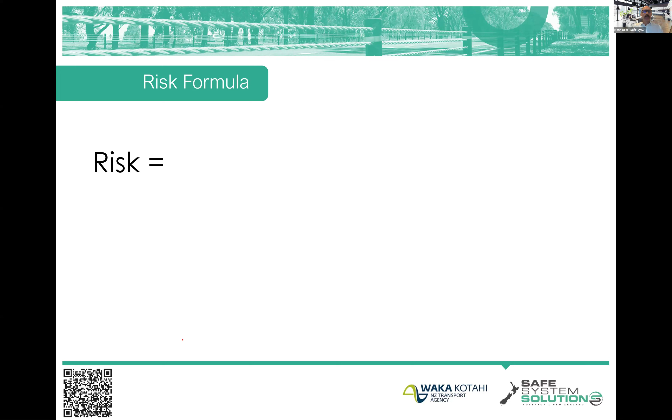So likelihood times consequence, or probability times severity, or probability times consequence. It's the chance of something bad happening multiplied by the magnitude of that badness, the severity of that.

Now, I am also going to give a prize out to who was it here - Connell, because Connell was sort of adding exposure, which is a little indication that Connell's probably got a bit of an idea of the safe system assessment methodology, which has extracted out exposure from likelihood, from traditional likelihood.

So if we go back to normal risk, that's the international definition of risk, not just for road safety, but anything - financial risk, environmental risk, you name it. It is, what's the risk of recession? Well, what's the chance we go into recession? How deep a recession do we go into?

But in road transport, the likelihood really encapsulated both the number of people exposed to a risk, then the chance that risk comes to fruition in a crash, then the severity of that incident. So when developing the safe system assessment methodology, which is the first component of a safe system audit, it was distinctly extracted out: exposure, likelihood, and severity.

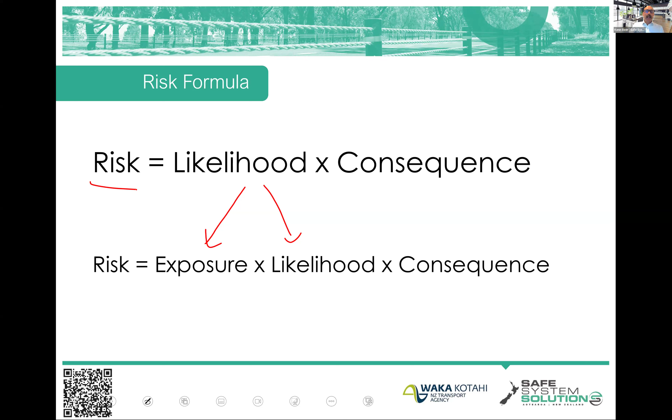And we sort of touched a little bit on that at the end of last session. I'm going to keep expanding on this, but just to show you, from an infrastructure perspective, what sort of things would influence exposure and likelihood and severity in terms of the infrastructure chosen?

Here's just an example of essentially closing off a conflict point, which is a railway level crossing in this one. It's a bit hard to see in this photo, but there's a mound of dirt and road closed signs on the other way. There is now no exposure to that crash. You could phrase it that there's no likelihood of crash because nobody's there, but that's driven by the exposure, the number of people exposed to that crash.

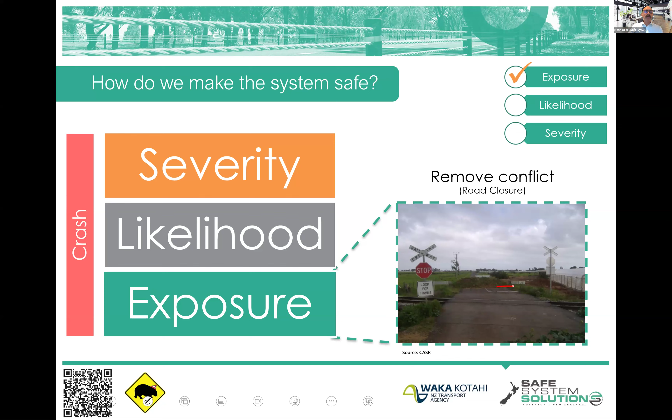Another one - sorry, and I should have said, count your wombats again in case that one on the last slide snuck through.

The other one is to completely segregate a road user group onto their own path in terms of bicycles or pedestrians or shared paths, and the exposure to the crashes has been removed - the crashes being the vehicle to bike crashes, for example. Yes, there's still the possibility that the bike itself crashes, runs off the path, or crashes into a pedestrian or the like. But when you isolate it out to the particular crash types, we understand that exposure has been removed.

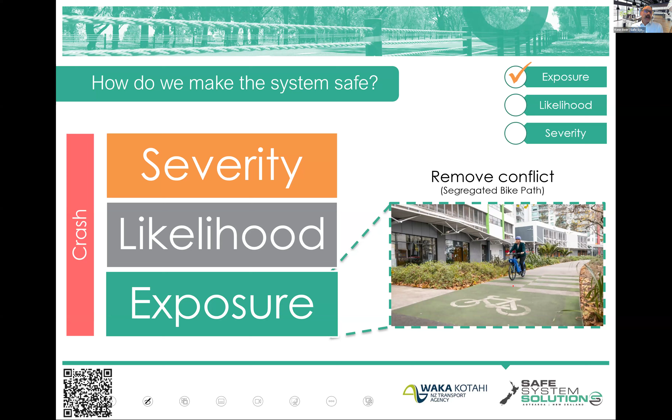The likelihood of crash is all the things that you can do to lessen the chance a crash will occur. And we've done a lot of these in a traditional sense for a long time. So we've got things like geometric design, presence of shoulders, line marking, lighting, surface conditions we provide.

In more recent times, we've started doing things like wide center lines, as you can see in that picture there, which I took sitting in the passenger seat in the car with Marcus, who's on this webinar. So all of these things, delineation, anything like that, is trying to stop the crash happening in the first place, and it lessens the chance of the crash.

But with all of these, generally we see the same severity of crash if it happens. So the wide center line, for example, we're lessening the chance of a head-on crash because people have a little bit more time to recover. But if a head-on crash occurs, it's the same speed, same angle configuration basically, and we're going to get the same outcome.

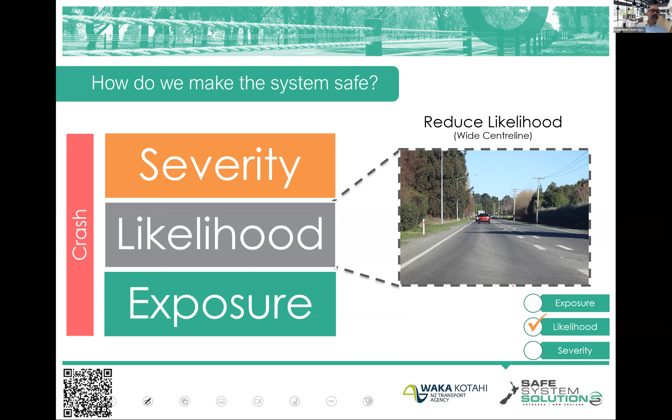Even traffic signals themselves only reduce the likelihood of crash. There will be some crash circumstances where they've influenced the severity a little bit, but what we see is that people drive through red lights unintentionally, also intentionally, and they are going at speed. Sometimes they're even pushing to try to go through and catch that last little bit of orange.

So we see the chance of crash come down because it's clear in terms of the control, right? You stop, you go now, and the like. So less chance of a crash, but still when they do occur, the severity is just as high, if not higher sometimes, than a passively controlled intersection, like a give way or a stop controlled intersection.

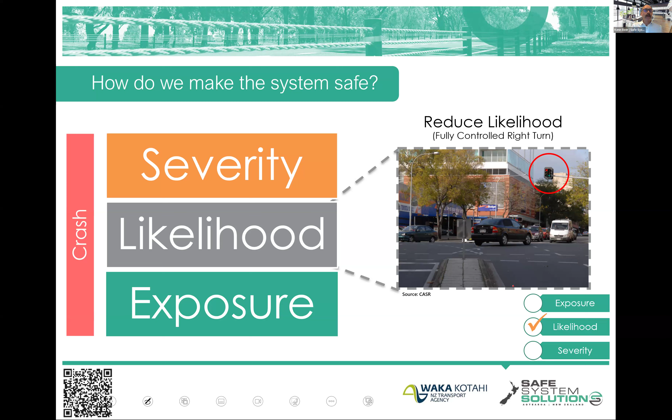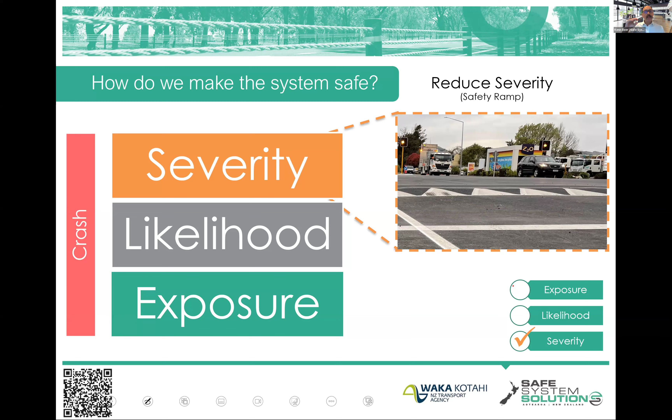But severity is associated with us managing some key variables that we can control. And we've got their speed, angle, energy absorption characteristics. So things like slowing vehicles at the conflict point will influence the severity. It could be raised safety platforms, raised intersections, and the like. When the crashes occur, the speed will be down, the severity will thus be less.

That's a crash. But the severity of every incident, pretty much every incident, is going to be lower. So it's a severity influencing device.

Now, this becomes really important in a safe system assessment, being the first part of a safe system audit, because we need to critically analyze existing road network and any designs that are put in front of you to audit, to say what factors in this road environment are influencing the exposure to crashes, the likelihood of crashes, and the severity of crashes.

And you distinctly review each of these for different crash types and quantify them. Now, you quantify them with your judgment, right? But nonetheless, we're trying to put numbers to the exposure to different crash types, the likelihood of different crash types, and the severity of different crash types. And we multiply those through. So I'll take you through that over the next few modules.

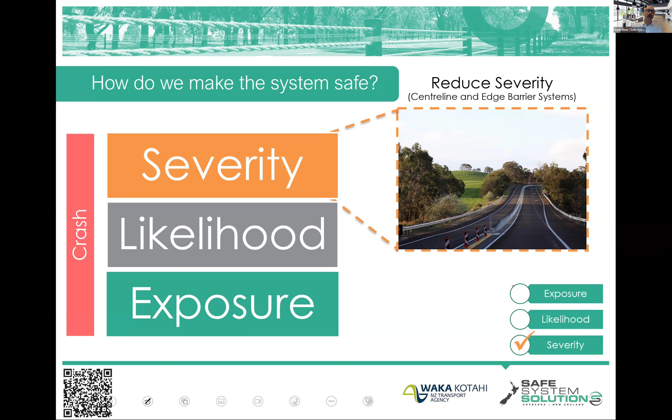So let's start with intersection crashes now. Intersections overall, understand a little bit about risk characteristics at intersections. And risk characteristics, just as I've talked you through there, is going to be the result of the exposure to crashes, the likelihood of crash, and then the severity of crash.

Now, intersections are this really interesting point on the road network. And any of you that have analyzed any of the outputs of risk tools that are used on the road network, and there are lots and lots of them available, and they keep appearing - KiwiRAP, iRAP, ANRAM, you name it. But anyway, we're not going to go into the details of each of those.

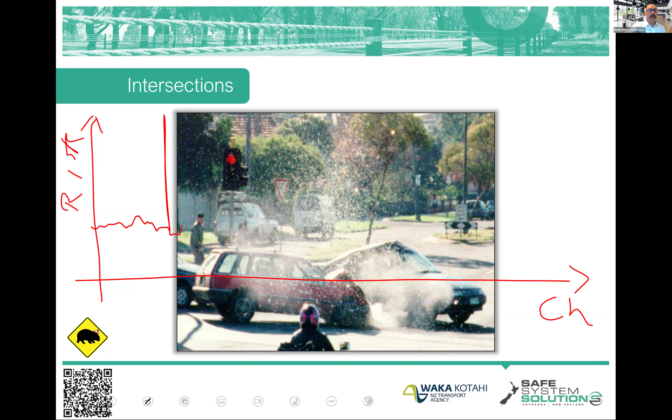But essentially, you can sort of have chainage along a road, so distance along a road, and you can have risk. And you'll sort of see that any road sort of bubbles along with risk and then spikes. Bubbles along and spikes.

And of course, these spikes are the intersections. There is an underlying inherent risk, but at the intersection it spikes. Now, it spikes because of a few things.

Some are very obvious, and I'm sure you're going, yeah, of course it spikes because there's conflict points. There's the ability to actually crash with another vehicle because the road's crossing, and that's absolutely one of them. We see car to car, car to truck, car to motorcycle crashes at intersections. We also have the points where pedestrians and cyclists will have to be crossing something as well. So that adds that bit of risk in there.

But the one that people often don't think as much about is the runoff road increased risk that happens around intersections. The reason for this is twofold. One is that there is turbulence at this location. By turbulence, I mean there's vehicles that will make mistakes, enter the intersection. Vehicles then avoid - they don't want to crash, do they? So they'll try to avoid this errant vehicle that's entered into the intersection incorrectly, and they leave the road. So the chance that they leave the road is higher because of all this stuff that's happening.

The severity actually is often higher as well because in our design of intersections, we just happen to put a whole lot of fixed hazards around them. We put things like signal pedestals. We put power poles because we need to run the power line down the side road. We put lighting columns. We put culverts because we've got to get the water under these roads somehow. So we've identified we've got this area of higher likelihood of leaving the road, and we've added all these things that make it really hazardous at this location.

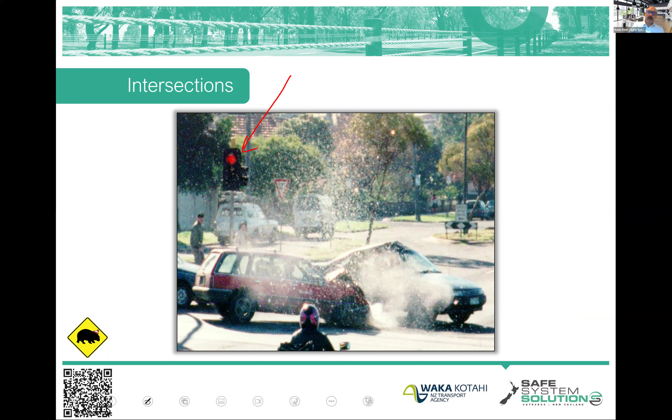This is back to your year 10 physics when we were doing vectors, if you cast your mind back. But really, to explain this simply, with two vehicles crashing, some of the energy is pushed out like that.

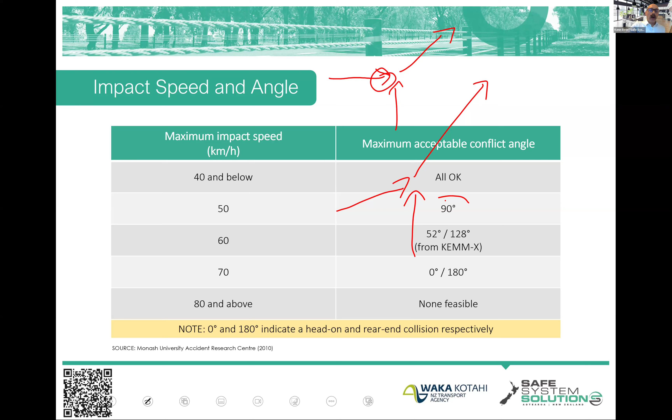If you crash with more angle on it, more of the energy is pushed out, as opposed to being directed into the other vehicle, if that makes sense. You can sort of imagine that. That's a harsher crash, that right angle, than sort of a bit more sideswipey, where the whole two vehicles push out together. So we know that about that 90-degree is about 50 kilometers per hour as that threshold limit, where we know things go really bad after that speed. It's not saying that everything below 50 is absolutely safe, guaranteed, but we know it starts to really get bad after those speeds, with small increases in speed.

You can see, though, as you get some more angle on this, you're able to bounce a little bit of that energy out. So those sort of crashes can happen at slightly higher speed. That's there, from KEMM-X. KEMM-X is the kinetic energy management model. It's sort of a detailed way to analyze angles and speeds and weights of vehicle to come out with kinetic energy levels. That is far more precise than you ever need to do in a safe system audit. With KEMM-X, you're generally thinking about angles and speeds and presence of heavier vehicles and those sort of things, and getting this general feel for the outcome that you think will happen.

So rear ends and head-ons, we sort of have lumped together at around this 70 kilometers an hour. There's, again, lots of research, lots of debate out there around this.

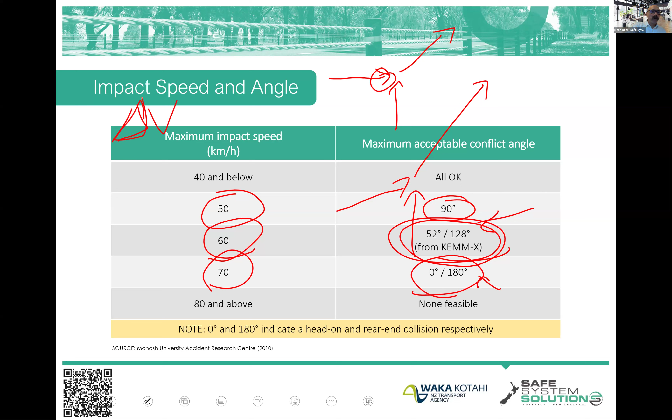The thing that's probably important to know around this and all of these is we're talking about delta V. Delta V being the change in speed. So the reason I want to explain that is if we've got a vehicle coming on an on-ramp, and we've got another vehicle coming along here, this can be done at very, very high speeds, and the delta V will be low, because we are talking about the difference in speed between vehicle 1 and vehicle 2. So vehicle 1 could be entering at 200 kilometers an hour, and vehicle 2 could be ticking along at 220 kilometers an hour. A delta V there is 20. So the initial crash, the transfer of energy is very, very low. And I stress the initial crash because that's going to be absolute chaos after that, assuming that they lose control and the like. So we wouldn't be able to likely operate that too safely. But the initial transfer of energy is what we're talking about in terms of that delta V.

And that probably covers off this when we see, well, you can't feasibly operate an intersection above 80 kilometers per hour. That is, unless you're accelerating other vehicles and having them in those configurations.

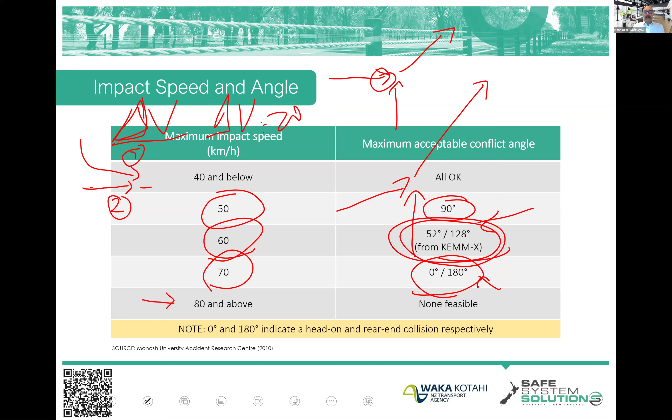So when we look at new intersections or existing intersections, we start to use these key variables to understand what we expect the severity of outcome to be. One is angle, one is speed, and then one is the vulnerability of the users. Now, you don't need to be as precise as this little diagram. You can generally say, I'm going to change color here, so I'm not using red. You can generally say, okay, vehicle coming out here, struck by bullet vehicle coming through here. It's about a 90 degree, so I'm going to say about 50 kilometers an hour is threshold speed. When that vehicle gets out and they're starting to turn, there's a bit more angle on that, so we can take that one and probably say 60 kilometers an hour is threshold speed. That's the kind of level of thinking that you need to do.

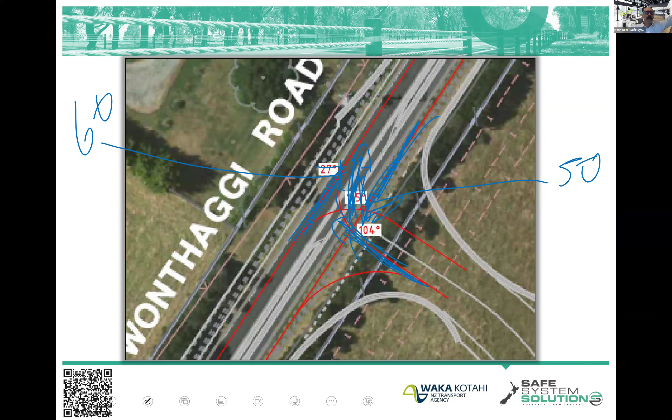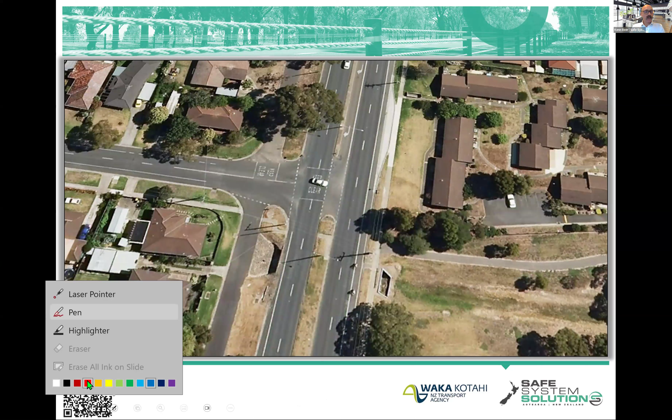There's probably enough talking out of me for now. Actually, I have to introduce you to this exercise. What I'm going to get you to do is utilize some of that exposure, likelihood, severity thinking in a little exercise here. So we've got a road.

It's a sort of major highway. It's 70 kilometers per hour. It carries 22,000 vehicles a day. It's about 10% heavy vehicles, 10% trucks and the like. We've got a side road here, which carries about 2,000 vehicles a day, maybe a little bit more. It's got a 50 kilometer per hour default speed limit, urban speed limit. This is an old residential area.

This is a shared user path. That's some sort of drainage structure, a big drainage culvert thing. Water flows in there and out here when it needs to. That's a bus stop, it's a bus route. It's a heavy vehicle route too.

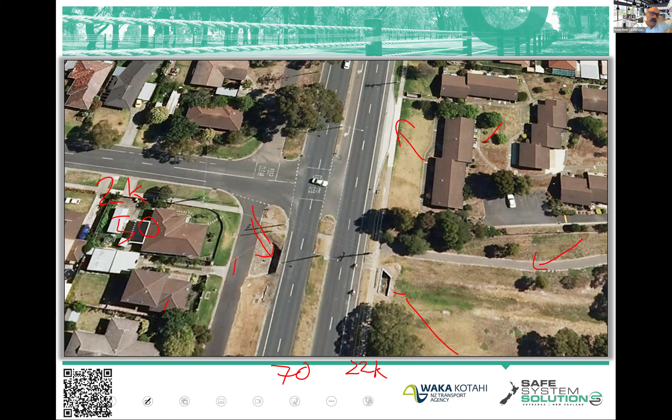What else can I tell you about it? These are service roads. They changed over time as to whether they were two-way service roads or one-way service roads. They're just basically providing access to the residential properties. They have openings further down and further up as well. Up the road, probably 400 meters or so, there's a set of traffic signals. Down the road, at least maybe a kilometer or a kilometer and a half, is another set of traffic signals.

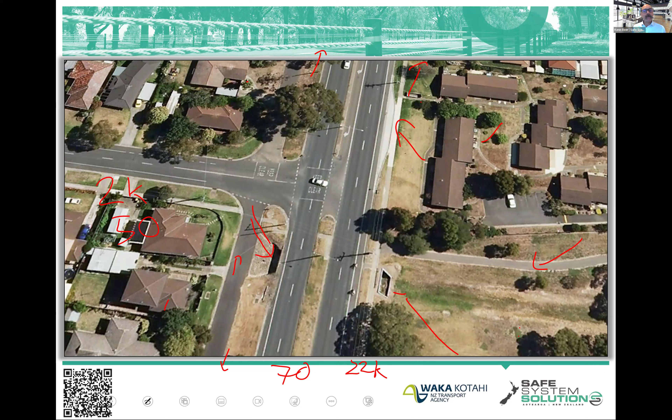Yeah, that's a bit of background on this site we're going to have a look at.

Let's have a look at it from the ground, and you can see there, this is looking at that site we were just looking at. So you can see, there you go, the two-way service roads there, but you've got a side road vehicle, you've got a turn lane. That's the bus stop that I was talking about.

Let's have a look from the other side, shall we? Okay, there's the drainage culvert. There's a shared user path over there. There's our intersecting road back there. It's got a sort of shouldery bike lane thing going on.

So your task is to remove fatal and serious injury crashes at this location. I want you to change things however you want to remove fatal and serious injury crashes at this location. You've got a $4 million budget. I'm always up for a 10% variation if you really need, but we're trying to generally stick around that $4 million budget.

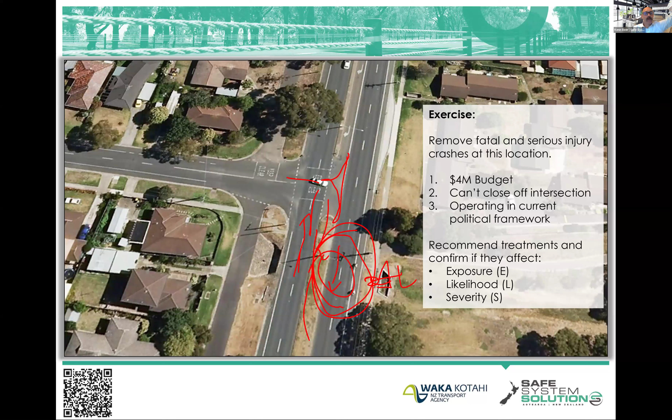There is actually a tool that was produced in New Zealand and is available on the Waka Kotahi website, the Seagull Intersection Assessment Tool. Shane Turner produced that with some others, I think - apologies if I missed somebody who produced that - but that's a cool little tool to analyze an intersection for a seagull treatment.

Okay, what else have we got here? So as people wanted to configure the left turn lane, the service roads, that's fine.

Dion can have a prize for knowing how much roundabouts cost. Yeah.

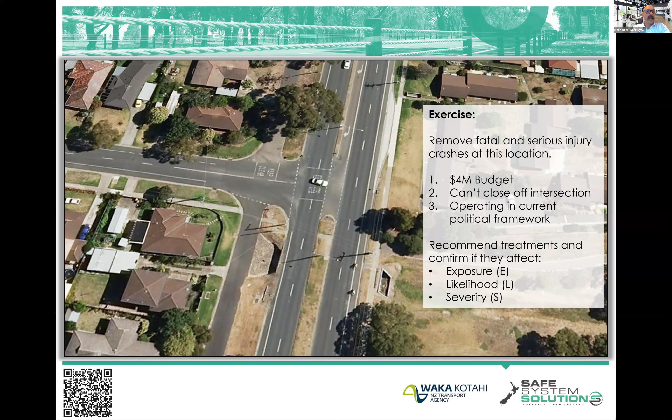A roundabout, to put one in this location and meet Austroads' Guide to Road Design Part 4B style requirements, would be close to 10 million, I reckon, because it would have to be big and you'd have to move all the services, acquire land - it would just be a huge undertaking. Your roundabout itself would need to be really massive, because you've got to get these large vehicles around it. It's a multi-lane roundabout.

You've got to provide enough lateral movement requirements so that they actually do slow down. It'd be quite a beast of a thing.

But interestingly, a lot of people started to say maybe we could do some sort of raised intersection, some physical treatment to slow people down at this point. Going back to the top to see who was first to start doing that - I think Marcus was first. We'll give Marcus a prize for that.

Looking at raised safety platforms, and then MJ6 - again, keeping Loretta on her toes to work out who that is - MJ6 has also said raised safety platforms, and then a few others have got into that.

Now, that's a really interesting one. I've been running this course or variations of it for about 12 years now. Admittedly, the first seven years, nobody was interested in the course, and now a lot more people are, which is great. But for those first seven years, doing this exercise, nobody would say raised anything on a major arterial like this.

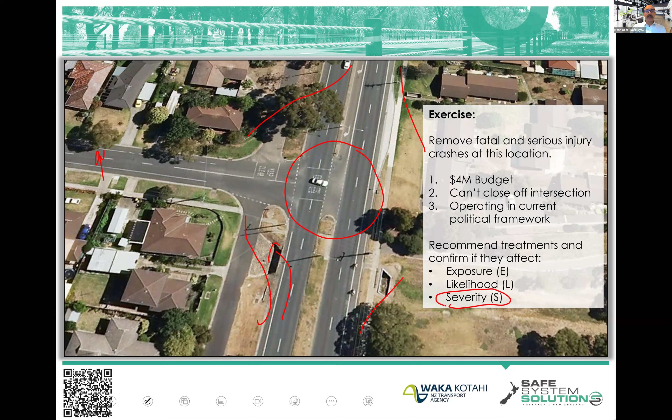We talked about the likelihood of crash being influenced by signalizing. In that scenario, signals kind of make sense for a number of reasons. There are signals further up, signals further down. The configuration of that intersection is quite well set up for signals. In fact, I dare say when they did the original duplication of that road, they were thinking at some point in the future this might be signalized, so let's design it so it could be.

It's unbalanced flow, so we have a lower volume side road with this big volume road. That kind of helps you with signals - you can control when these happen and the like. But signals are only going to influence the likelihood of crashes in their native form.

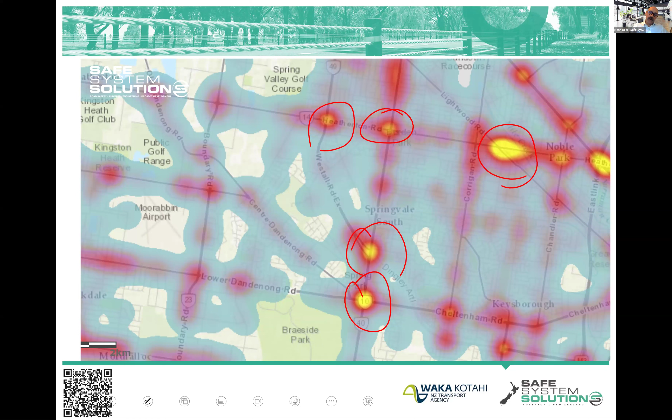Pedestrians and cyclists, I'll put them to the side for the moment - next session we're going to have a lot of discussion on pedestrians and cyclists at roundabouts, how you can best cater for that, what the challenges are, how we make that as safe, because there are definitely challenges for pedestrians and cyclists. But from a vehicle-to-vehicle perspective at intersections, roundabouts are our safest form without going to full grade separation and completely separating. Vehicles slow down, they look around, the angle of crash is better. It's just a really wonderful treatment.

In fact, we know that for cars, if we put in a set of traffic signals - so we've got a give way sign controlled intersection, we go to signals - we get about a 40 to 45% reduction in death and serious injury. If you go to a roundabout, you've got 80 to 90% reduction in death and serious injury. It's pretty impressive for a roundabout. It's not to say that signals don't improve safety, and that's a really important thing to understand - they just reduce the chance of crashes happening, but we still have this residual of high speed, high severity crashes at signalized intersections. There's much less of that happening at roundabouts. We see some run off road crash incidents and a few other things.

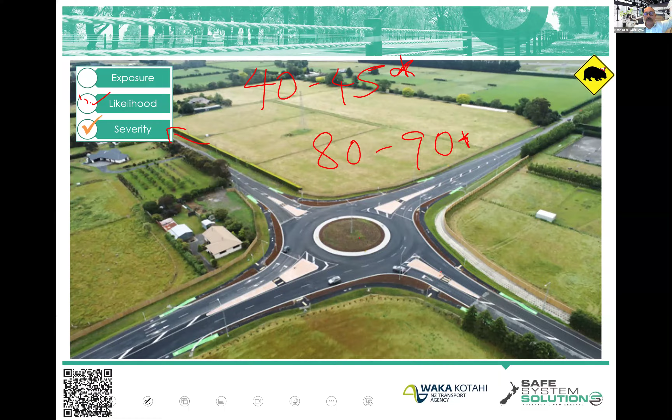This is the UK's equivalent of a 4-way stop that they do in the US or Canada - there's a couple in New Zealand as well. So that disruption of ultimate priority is really quite interesting. Large vehicles can just track straight over that, so you don't need to worry about swept paths of larger vehicles. But it's a very different road environment there.

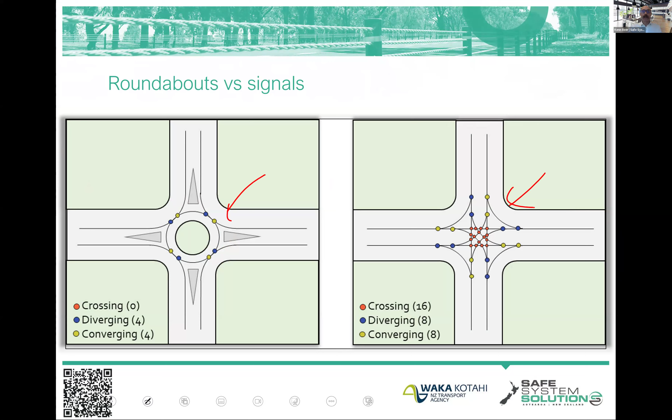Back to road safety engineering 101 - roundabouts have a very small number of conflict points for that vehicle-to-vehicle crash scenario. Each one of those dots is a conflict point, an ability to crash. Signalized intersections have lots of movement, lots of ability, lots of conflict points. We also have that angle of crash I mentioned - it's a better crash, you just crash better at a roundabout than that high angle, high severity crash.

A set of traffic signals does a certain job in alerting them back to the road environment, but a roundabout does a way, way better job of activating them in the driving task. So they come back to reality - if they're half asleep, they wake up for a little bit to navigate through the roundabout, look around, slow down, and carry on. That's huge wins in road safety. Sure, I've still got concerns around them going back to a dazed state, but at the point of significantly higher risk, they are much more alert.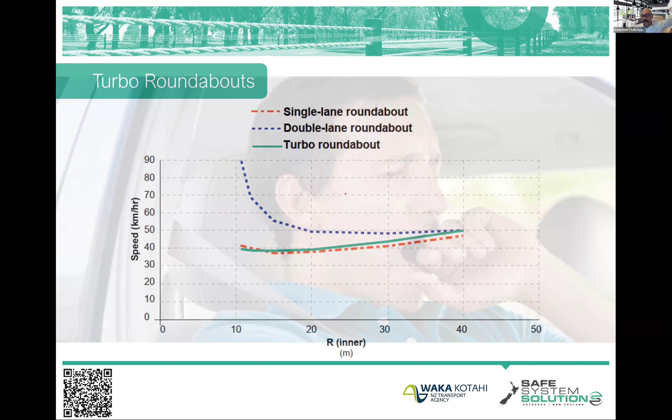So if we look at roundabouts in a little more detail - this is a slight tangent, I just think it's fun, and there is some relevance to it in safe system auditing. Roundabouts are exceptional, but the more lanes you add, the less exceptional they get, because people take straight lines through it. You have side-swiping opportunities, incorrect turn movements, turning across other lanes and the like. So here's a demonstration of speed and radius in a double lane roundabout versus a single lane roundabout. Speed's always a pretty good proxy for risk, essentially.

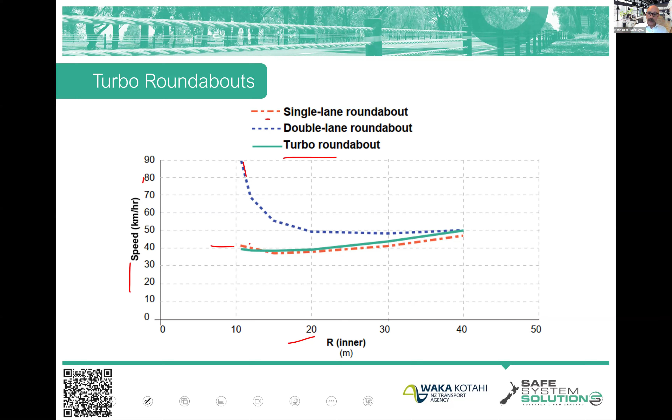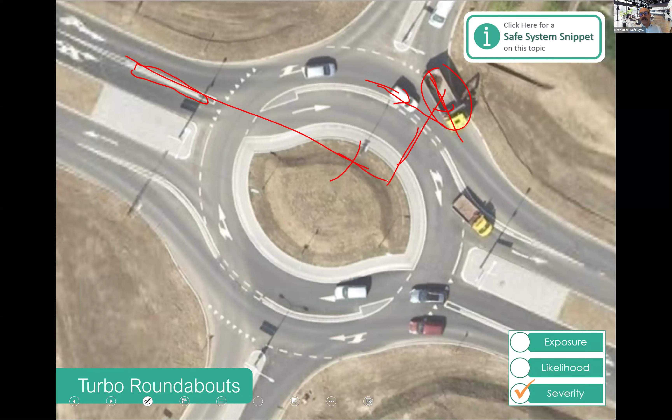If this was signalized and this truck made the mistake - which they're obviously in mistake-making mode - and entered in, and this white vehicle is coming through at speed, we've got a high speed and a harsh angle crash. Anyway, so there's a turbo roundabout. We don't have too many in the Southern Hemisphere, there's a few popping up, but I just thought I'd show you out of interest.

But this one's cool, isn't it? This is a massive turbo roundabout out of the Netherlands. I flipped the photo because they drive on the right, and that would really blow our minds if we tried to understand what was going on here, driving on the other side of the road. But the reason I show it is more about the cultural difference.

We had a Dutch engineer brought out to do some work with us on cyclists at roundabouts, designing roundabouts to improve cyclist safety. I showed this to the guy and said, yeah, this boggles my mind - I mean, I love it, but just the sheer land take, the size of the thing, and the complexity of it, it's amazing.

And here in Australia and New Zealand, after a bit of a chat, I said, based on the volumes and what this area was, that'd be a large signalized intersection probably - maybe it would have got to a grade separated interchange, but probably a large signalized intersection. And the Dutch engineer's like, but what about all the death and serious injury to your community? And I'm like, yeah, I know. He could not fathom that we would possibly run a high-speed signalized intersection without some major traffic calming to get vehicles to appropriate speed.

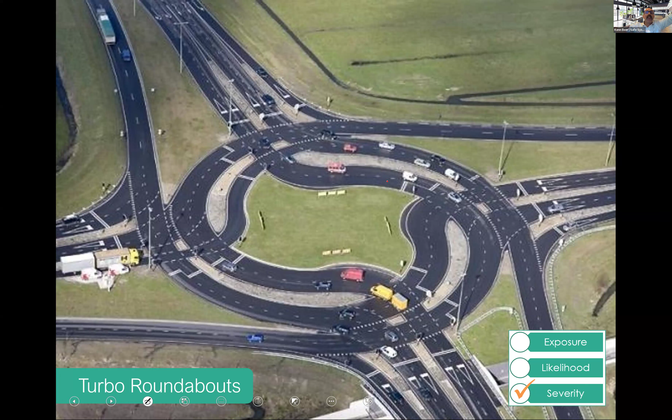From a philosophy perspective, it would be absolutely ridiculous for the Dutch to ever let one of the intersections that we build hundreds of every year just happen without even thinking about it. It just would never happen.

Anyway, the principle I'm trying to put across is that a large high-speed signalized intersection doesn't align with safe system principles. Because when you go back to those fundamentals, people make mistakes, crashes will happen. We need to make sure they're not death and serious injury. That just does not line up.

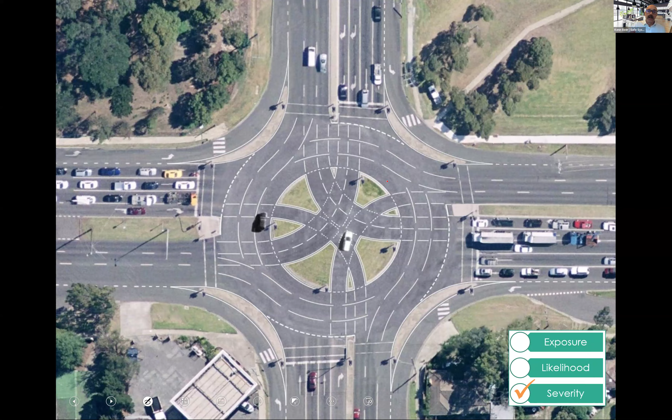So, raised safety platforms - we talked about that, and it's really heartwarming to see so many people going for this. These are not urban speed humps. They're more shallow, designed with grades and ramp lengths to just dampen speed down to appropriate speeds.

But then they said, well, our top 50 intersections for death and serious injury in our region are large signalized intersections. Are we really just going to build another one and say maybe this one will work? No, we've got to do something else. We've got to start addressing the severity.

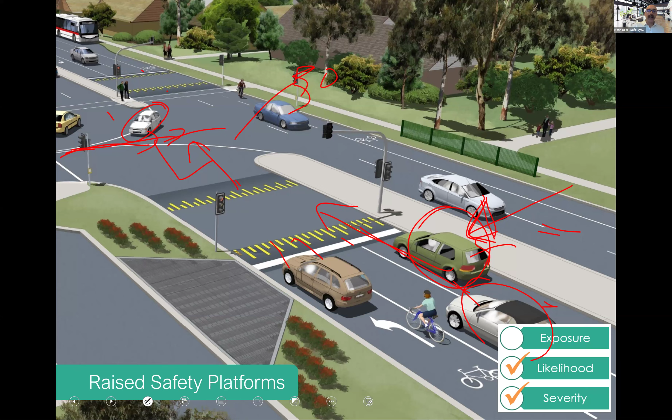Anyway, so yeah, there they built it. And you can see 50 advisory speeds. That's another interesting one. 50 kilometer per hour advisory speeds.

People get less irate when you say, hey, we advise you go 50 because you're going to have to navigate over this and it's going to wreck your car if you don't, rather than if you put a regulatory 50 and a speed camera there. They get really irate. This is revenue raising, you're trying to catch people, they think. They're not objecting to going a slower speed through the intersection, they're objecting to government intervention and regulation, essentially.

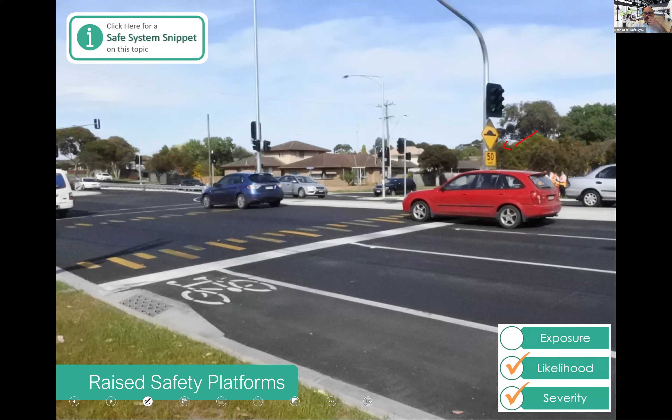And so I was out there with a colleague doing the post-opening audit of this and took this photo. I love this photo in the sense that you've got a vehicle braking on the approach to a green light.

Now, my friends in traffic operations get angry at this photo. They're like, oh, it's so inefficient, why are we slowing everybody down when there's just a one in a million chance that somebody's actually going to crash? Well, what are you talking about? If we built a roundabout there, everybody would slow down and you wouldn't be arguing about that. It's just because this isn't something we've been doing for the last 50 years.

So that's another little side spin-off benefit: a reduction in the dilemma zone. For those who don't know, the dilemma zone is a traffic engineering term, and a prize for whoever named it - it's the best naming of a concept ever, in my opinion.

The dilemma zone is the point in time and space when a driver sees the signals turn orange and they're in a dilemma: do I put the foot down and go, or do I brake? And you can calculate dilemma zones.

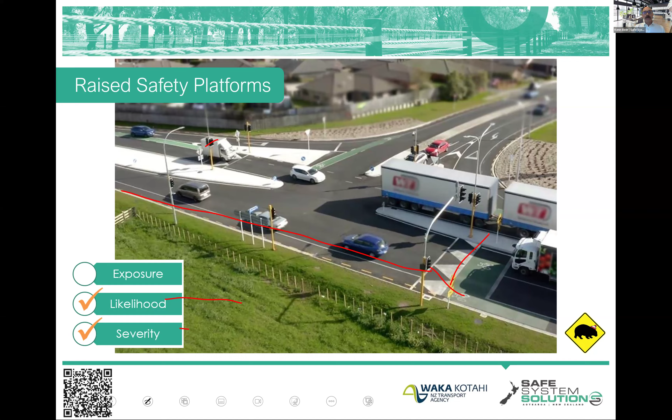One out of Christchurch, which is raising the full intersection. Again, of course, you get community grumbles about these sorts of things because they're new and different, and it's changing the way people use an intersection. But it's going to result in far less death and serious injury.

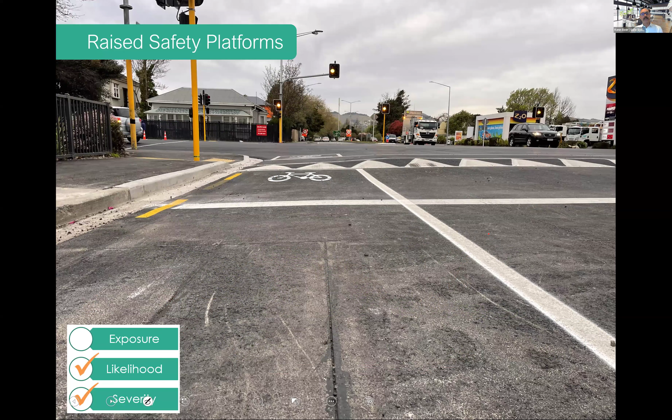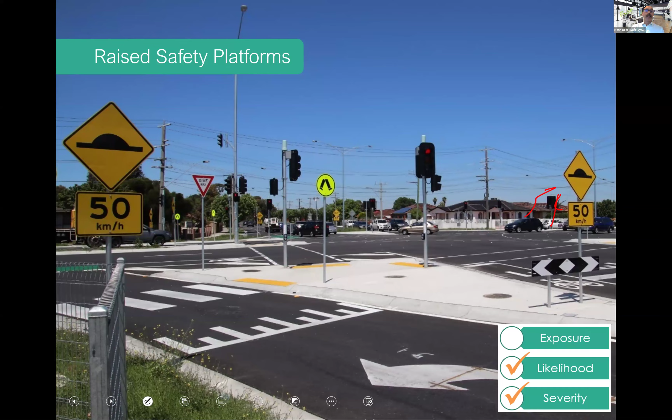This one's got 54,000 vehicles a day on one leg and like 28,000 on the other. These are big intersections. And I'll leave it at that point with the Austroads guide, or Austroads information about raised safety platforms, written by New Zealanders too, this one.

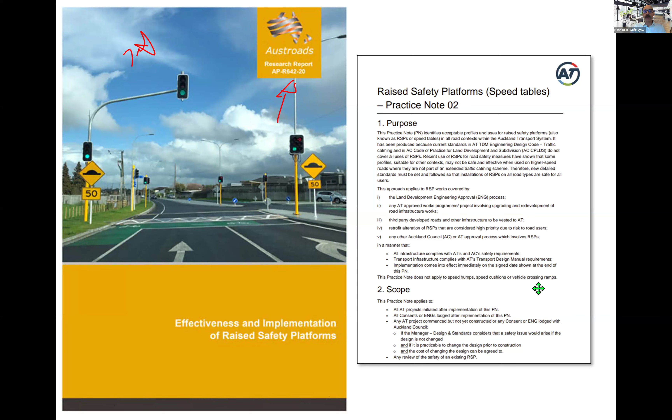Anyway, there's the Austroads document. Austroads documents are free, just get your login for the Austroads website, download it free. There's some Auckland Transport design notes and the like about raised platforms as well. So good information available. I popped this up there just out of interest.

We talked about big roundabouts, and then we have been playing around with compact roundabouts quite a bit and trying to understand, can we create roundabouts that give us the same sort of outcome at a much lower cost? This is a compact roundabout we were involved in. Very small circulating radius roundabout, reasonably big concrete apron, and essentially large vehicles really track around sort of like that in order to get around.

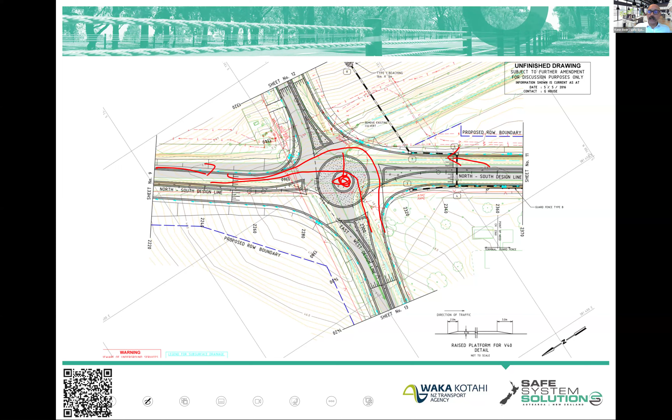Lots of concerns around it being a bit straight through this whole thing. So use of some raised platforms to slow vehicles on the approaches as well, so it's actually a couple of them. You see one there - you usually use reverse curves on the approach, so you sort of chicane people into a roundabout to start slowing them down.

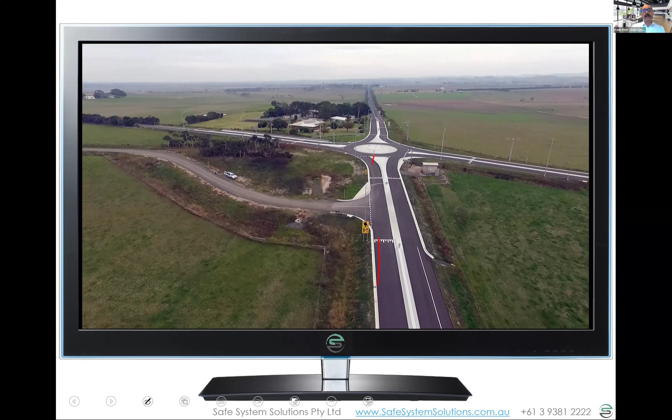This one, without trying to buy up too much land and the like, tries to do that with some shallow raised platforms and then a slightly harsher raised platform and then into the roundabout itself. So it's a pretty good example - it's about half the cost of what a full-size roundabout would be. So it's not like it costs nothing, but it's pretty great to be able to sort of halve your costs, maybe get double as many intersections treated associated with this.

And we pretty much, you can't really get comprehensive evaluation from a crash perspective from one site - it's just statistically ridiculous to try to do that. But in terms of monitoring speeds and general compliance and these sort of things, it really is performing just as well as a full-size roundabout.

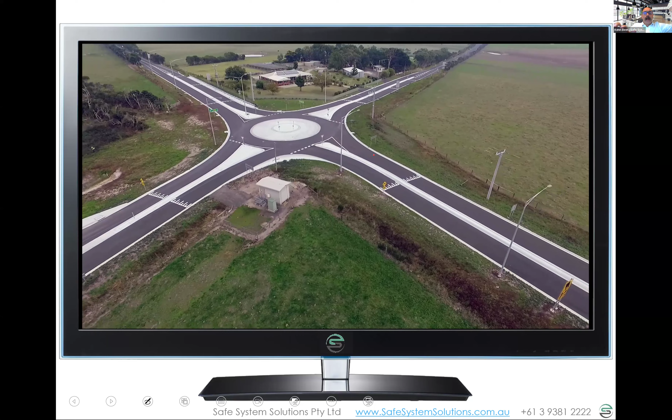Happy to send people the detailed designs of that if they've got a particular interest in a particular aspect, there's all sorts of challenges and fun in designing those. And we wrote a road design note guidance for the Victorian government on how to think through some of those particular aspects - that's available publicly as well.

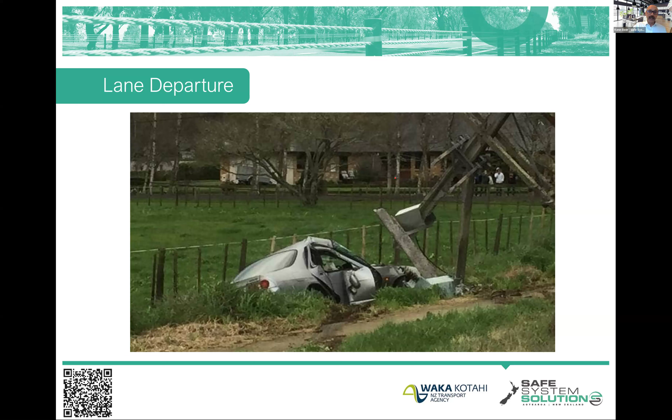So much of the New Zealand road network is just trees, poles and culverts, often separated only by a white line. If we crash head on, it's generally survivable up to around 50 to 70 kilometers an hour. But above that, we're in pretty bad territory.

Here's a classic bit of state highway, and these vehicles have to stay in their lane to survive. If they're lucky and leave their lane either side, they get a bit of recovery area on the left. On the right they may get some recovery area if there's no vehicle coming the other way, but if there is, there's not much recovery area. So we're really just running this tightrope of death and serious injury either side. It's a road environment that does not align well with safe system principles, because mistakes result in death and serious injury.

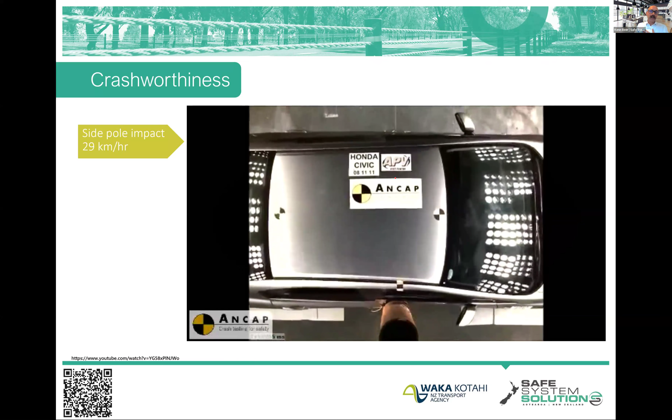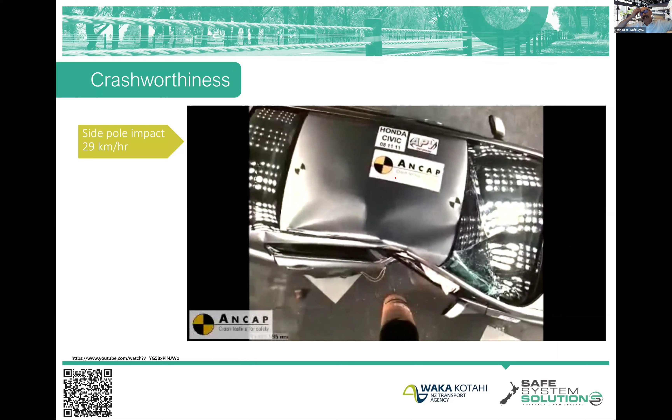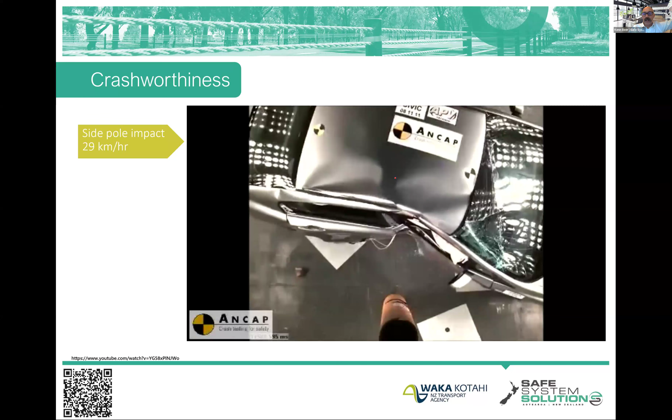I talked about the inherent weakness - now, weakness is not necessarily a bad thing - the inherent non-energy absorbing characteristics of the side of a vehicle. This is the side impact pole test, the old one, at 29 kilometers an hour. It's crushing that vehicle pretty badly, and you can imagine the occupant sitting pretty close to that. The ability of the side of the vehicle to protect us is a challenge.

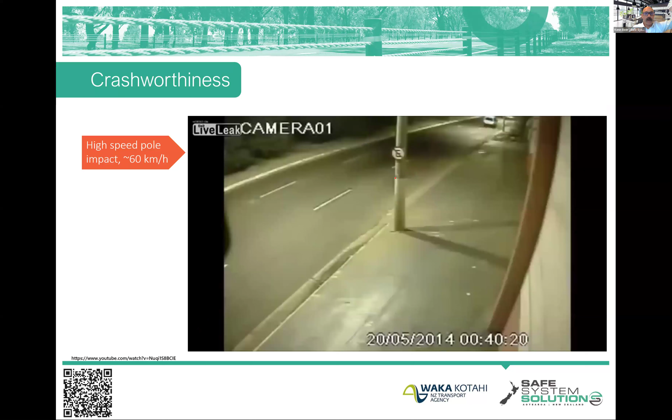Here's one that's quite a violent crash coming up - 60 kilometers an hour is predicted based on the frames. You can see the huge violence in terms of energy transfer. It's not expected to be survivable.

So clearing the road of all those hazards is a logical thing to start thinking about - can we get rid of the poles, can we get rid of the trees? Certainly in the first 4 meters, that does a good job at reducing death and serious injury. Run-off road casualty crashes per 100 million VKT - vehicle kilometers traveled - is the way you would compare like for like.

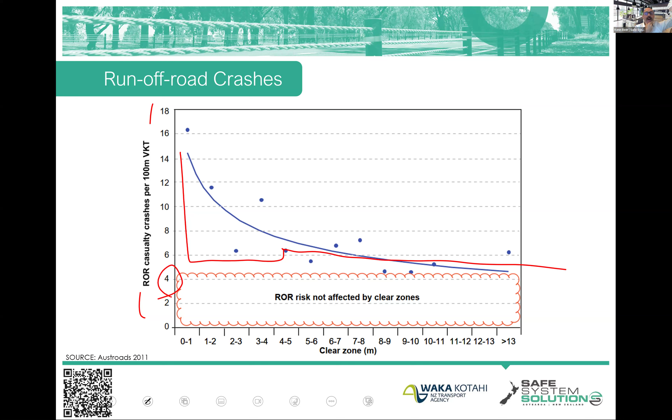You get that big benefit, but it's pretty interesting as it kind of flattens out. So we're not eliminating risk, we've reduced it, but it asymptotes out at around 4, in this work that Austroads did. These are people rolling over, going beyond whatever distance has been cleared, and finding trees or poles. So there's still that risk out there.

So the old concept of clear zones - it's not necessarily a safe place to be, it's not the highest alignment with safe system principles. It's pretty valid if you're able to achieve it for the first 4 to 5 meters, but this was essentially the best way we could think about managing a roadside 10, maybe 15 years ago.

That's because barrier systems weren't that advanced. There were things you could put in there, but we were always worried about them as a hazard - people spearing, vaulting, hitting them badly. But barrier technology has gone off the charts. It's so advanced now that putting a barrier system around 3 to 5 meters off the edge line is actually safer than clearing 10 to 15 meters of roadside, because there's less rollover risk and vehicles can't get beyond that.

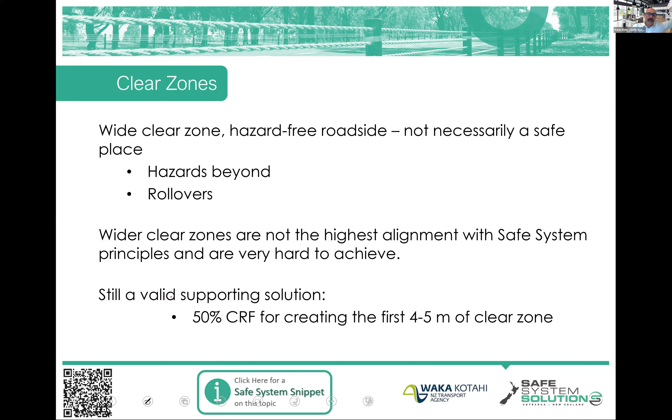And it's fairly consistent with what the new Austroads Guide to Road Safety Part 6, Austroads Guide to Road Design Part 6 - got to be careful with that. There's an Austroads Guide to Road Safety Part 6, and there's an Austroads Guide to Road Design Part 6. Give a prize if you can tell me what the Austroads Guide to Road Safety Part 6 is about. This one's the Austroads Guide to Road Design Part 6, which is roadside design, safety, and barriers. Nobody's going to have a guess at that.

The idea of the safe system, fully contained roads, is very much integrated into this. And Courtney is on it - Road Safety Audit. Yes, Road Safety Audit is the Austroads Guide to Road Safety Part 6.

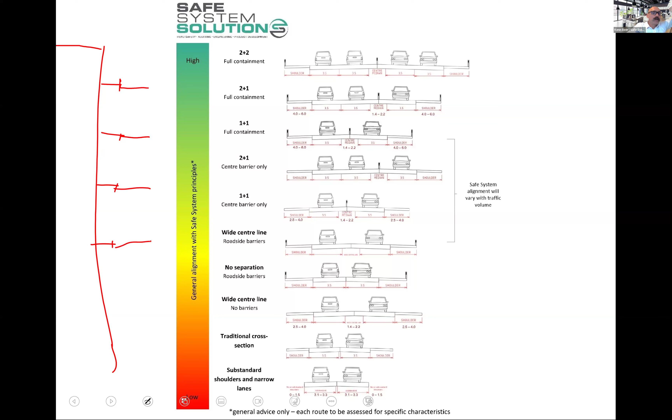The way we have operated our road system in the past is to put a white line. And then, if we were worried about the risk, extend the balcony a bit. And then put some warning signs up. The energy of the fall at 100 kilometers an hour is like the 5th or 6th floor of a high-rise building. You're going to die if you hit a tree or a pole or a culvert or the like. So why are we thinking about the roadsides any different to these? We put - absolutely stock standard - that you would put a barrier system. You don't need to go all the way back there.

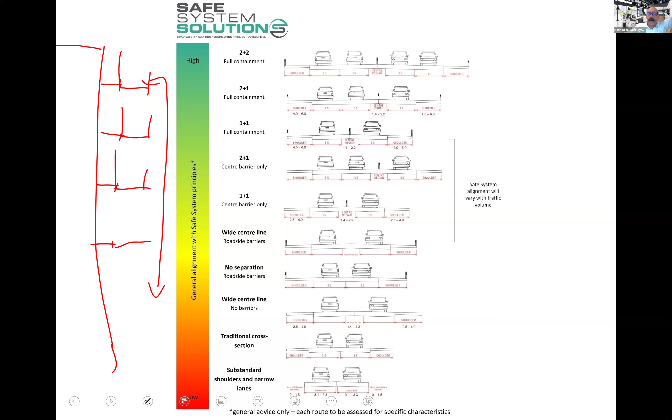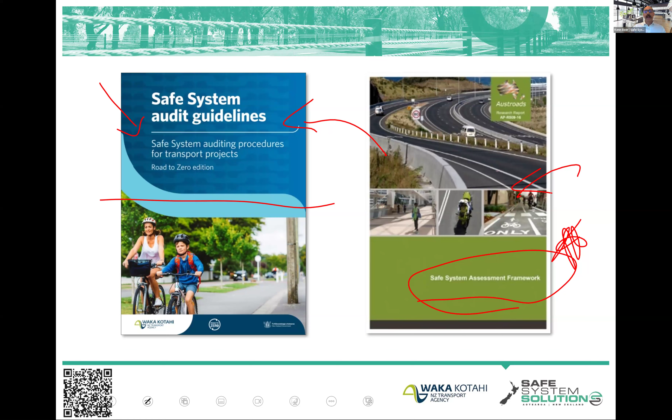Okay, so the Safe System Audit Guidelines are there. They're available - I could tell you the website. They're still taking feedback on these. The Safe System Assessment Framework is the first component of this. So that's what we're going to be starting to do, is really do some safe system assessments of designs and existing roads and the like, and get that practice. And then we do a bit of road safety auditing.

So what we'll do is we'll look at an existing road and a road design, and we'll say, what is the risk of runoff road? What's the risk of head-on? What's the risk of intersection crash? What's the risk of a pedestrian being struck? What's the risk of a cyclist being struck? And what's the risk of a motorcyclist being struck? And we will try to quantify those.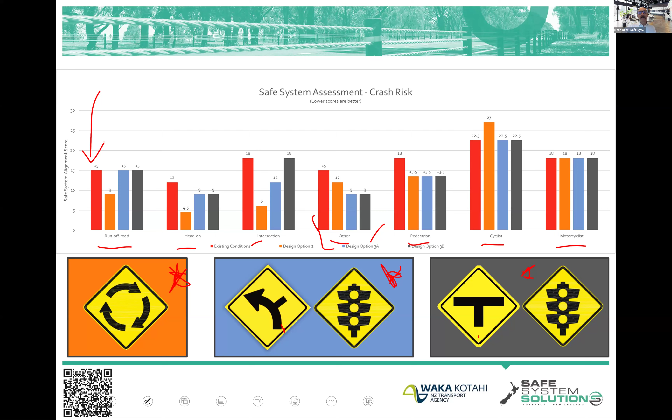The way we do that is to utilize a thing we call the safe system matrix, or the safe system assessment matrix. It could also be called the safe system assessment table. What it has is exposure, likelihood, and severity as the rows.

So that's why I've been banging on about exposure, likelihood, and severity. And then across the columns, we see these different crash types that I just talked about: run-off road, head-on, intersection. Now these are vehicles, because then we cover off pedestrians, cyclists, and motorcyclists over here. Other will be any crash type you predict that doesn't neatly fit into those.

Examples of other crash types in safe system assessments are railway level crossing crashes, side swipe crashes, crashes with animals, sometimes e-scooter crashes, where you're saying, okay, it's a very distinct element in its own right here. I'm not comfortable having it mixed in with pedestrian crashes or mixed in with cyclist crashes. I want its own entity. You use the other column in that circumstance.

I want you to think about these like crash codes. If you were doing a crash reduction study or the like, if a pedestrian is struck at an intersection, you account for that in the pedestrian category. Yes, it happened at an intersection, but we're thinking crash type, not spatial location.

Probably makes a little more sense now why we had some numbers here. It's going to help you with your severity scores, because you'll be able to refer to this and say, oh, that looks like it's about a 3, or somewhere around the 2 or 3. Maybe I'll take a 2 for that. You'll be able to get a little bit of guidance from this.

I'm going to jump back and show you more detail before introducing the assignment, so we're ready for this next session. Under exposure, we have AADT, pedestrian numbers, and cyclist numbers. So if you had an AADT of say 3,000 vehicles a day, how many vehicles are using this road? You can't put 3,000 in there because that's not between 0 and 4.

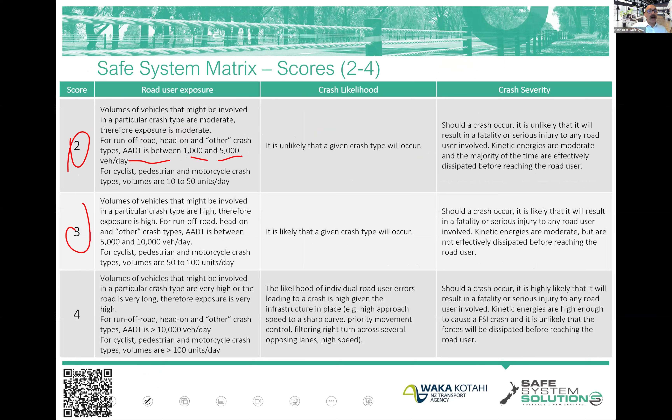You have to go to the scoring reference sheet. What are we saying here? Well, that one's no exposure, that's a 1 - vehicle volumes involved in a particular crash type are low, therefore exposure is low. For run-off road, head-on, or other crash types, AADT less than 1,000 vehicles a day. No, we've got more than 1,000 - I said 3,000. AADT between 1,000 and 5,000 - there we go, and that score is a 2. So you go back and put a 2 there. It's as simple as that.

Pedestrian numbers - if you're given pedestrian counts in the area, great, you can use that. Go to the reference sheet and say for cyclists, pedestrians and motorcycles: between 50 and 100, or between 10 and 50, or greater than 100. You've got that reference sheet to go to. If you're not given the numbers, and often that is the case, you just make your prediction based on what you see out there and what you know of the area.

So you're quantifying exposure, and you do that across the board. Then for likelihood, you list all the factors you see at the intersection, in the design, that influence the chance of a crash. Examples include speed, geometry, shoulders, offset to hazard, delineation, guidance, surface conditions, or whether the area is subject to fog. All of these things you'll be dot pointing as ideas.

And then you'll make a call based on this guidance to say it's highly unlikely that a crash will occur, it's unlikely, or it's likely. Now remember, we've already accounted for exposure, so you're not saying it's unlikely a crash will occur because there's hardly any vehicles there - no, we've accounted for that fact already.

You need to think about this from an individual perspective, using an analysis of the infrastructure and the likelihood of a crash, in relative comparison to other infrastructure and the inherent chance of crash associated with the physical infrastructure. There is subjective judgment in that - I don't deny it, it's no different to other risk assessments where you make a call. Then you do the same for severity.

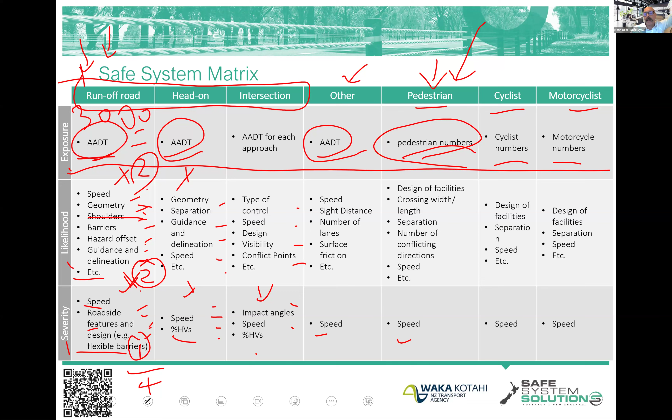For severity, we've got speed, the severity of hazards being struck, or the presence of heavy vehicles - larger vehicles carrying more mass and energy make things worse when they happen. Speed is a huge factor. Impact angle at intersections is another one. There's information here talking about kinetic energy and predicting outcomes, and that you should use safe system threshold speeds - this graph helps you with that.

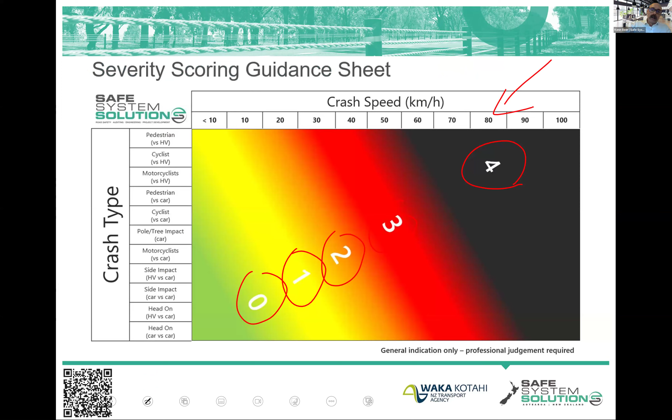Okay, so that was an introduction to that. We're not going to get you to do a full working of a safe system matrix as your assignment. What we're going to do is make sure you really understand what influences exposure, what influences likelihood, and what influences severity. The way we'll do this is to get you to pick an intersection.

This could be the intersection out in front of your house, it could be one on your way to work, or one you remember from a holiday - it doesn't matter. You won't actually need to go to this intersection if it's not convenient, you can do it from Street View, whatever works. This is less about absolute precision and more about the concept of categorizing into exposure, likelihood, and severity.

Loretta will show you shortly how you get this in the learning management system and upload it, but I'll explain it while I've got it here. The first thing you'll see is an instruction sheet, and it gives you the steps to follow, so you'll be able to just follow that.

You put your name in. Anything highlighted in yellow, you're going to have to do something with. Put your name in, then put a link to the street view or the coordinates of your intersection, so the people marking your assignment can dive in and have a look as well.

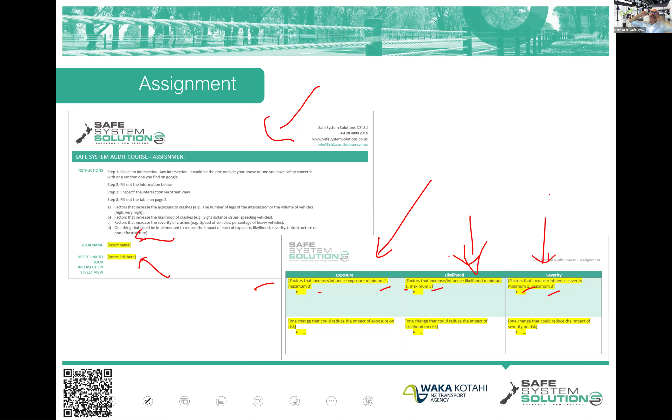Then you do severity, between 1 and 3 things that influence the severity of the crash when it happens. Remember, like we've done severity a few times now, speed, angle, vulnerability of user, these are the key things. Amount of heavy vehicles could be one. So of what is currently there, you do between 1 and 3 for each of these.

Then you go: tell us one thing you could change that would influence exposure, one thing you could change that would influence likelihood, one thing you could change that would influence severity. Just one thing, just the way we did with our raised intersection or that signalized intersection we were looking at - one thing you could change that would influence that particular aspect. Okay, I hope that makes sense.

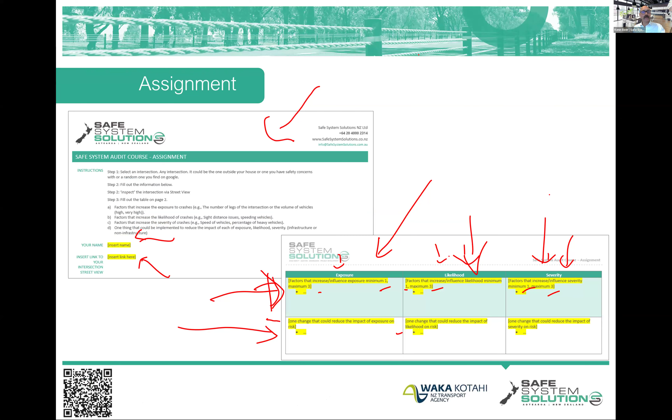Loretta's now going to take you through the learning management system and show you how you find that sheet, how you upload it, how you make all of that happen.